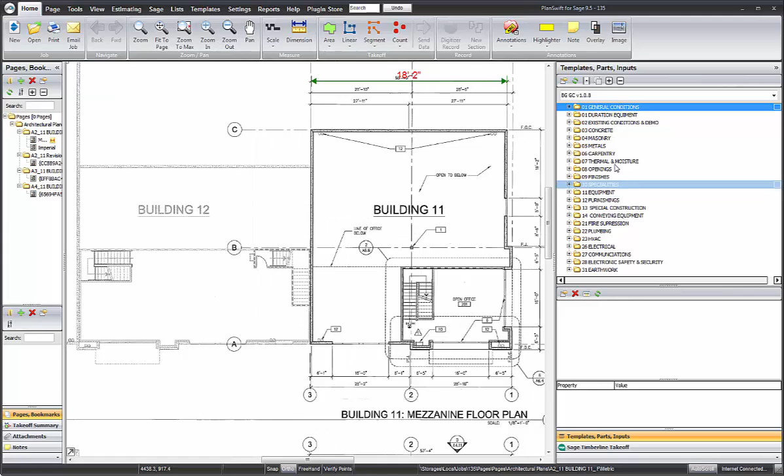I'm looking at them zoomed in, looking at this small area here, and over here on the right is the plugin. You can see that we have the top levels that are all compressed upwards.

If we open up a top level like concrete, it will open up and you can see the sub levels. And then underneath the sub-levels you can see the detailed assemblies that we have. You know they're detailed assemblies by the icons that show you how you are going to use the assemblies.

Count mode here, area mode here, linear mode like this. Sometimes this icon right here can be used for linear also.

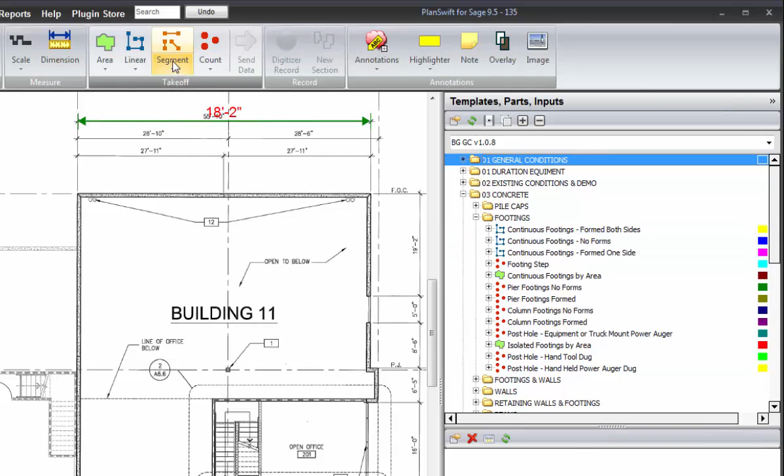So how you use the plugin is you have your plans, you have your plugin, and you find the area for the type of work that you would like to take off, and then you drill down until you find the plugin that you would like to have.

Now I'm just going to do some quick examples here to show you how to answer the questions and use the plugin, and then how to review the plugins.

I'm not going to be overly careful about making sure I'm right on the lines and all that when I'm doing the takeoff. So as I drill down in the concrete, I would like to take off some linear, actually first I'll take off some column footings.

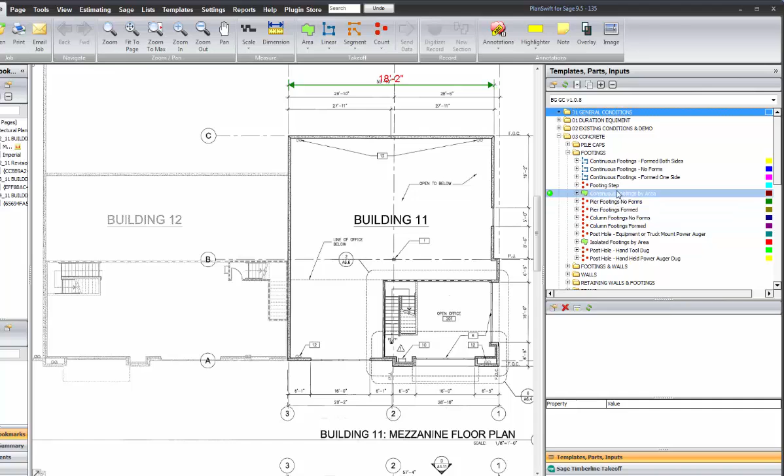So I would say yes, we're going to take off some column footings. They're going to be formed, and when you find the assembly that you would like to take off, you look for this green button and you press it and click on it with your mouse.

What happens is it brings up this dialog box, and you can see we have the title of the assembly up here, and you can modify this if you want. So I'm going to say this is column footings formed in Bldg 12, so you can modify the title.

Now you get to answer the questions. Here's a footing width, here's a footing length, and here's a footing depth. These are starting point values that are stored over inside of the database, but you can change them on a job by job basis if you want to do so.

Here's a concrete PSI. There's actually a list of different PSIs, so you click the list icon here and you can choose a different list, and you can modify the waste percent if you'd like.

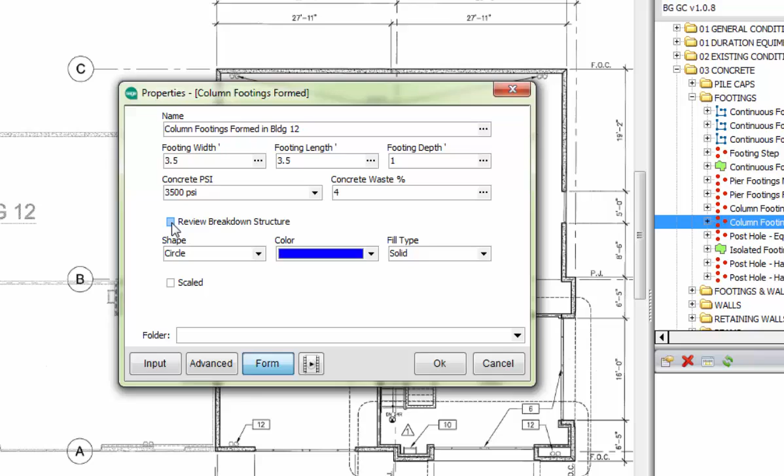Down here is location, floor, zone. They're WBS codes. You can turn them on or off. If you do not want to see them, turn them off. If you would like to see them, turn them on. You have location, floor, zone, WBS 1, 2, and 3.

And then down below that, you have the shape of the, in this case, the count mode that we're going to have, which I'm going to say is square. We have the color, and you can pick different colors if you like. And then here is the fill type, that will be inside of the color.

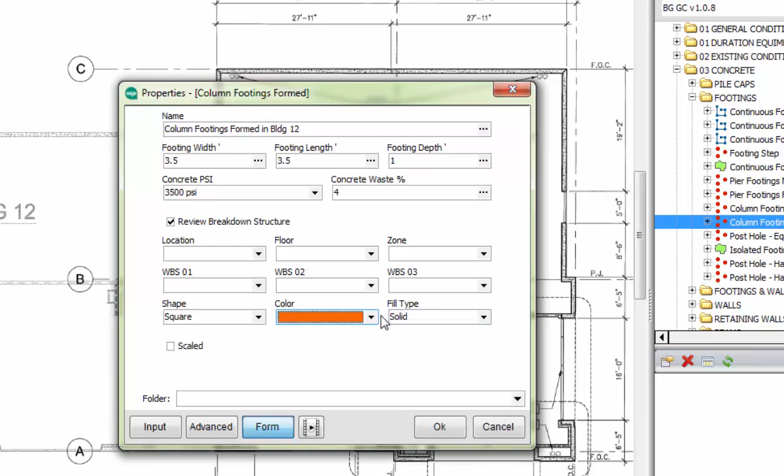So when I'm all done setting this up, I click OK, and now I can click the places where I want to have the columns, and I'm just making up some values here. When you're done with your takeoff, you hit escape, and now you're on to the next takeoff that you would do, which in this case is going to be linear footings formed on both sides.

So I find the assembly I would like to have, I click the green button, the dialog box comes up again. It's going to remember some values. I'm going to go back to 3 foot wide, 1 foot deep. Do I want a keyway?

I can say 1 or 0, 1 for yes. What's my concrete waste? I can modify that if I like. And once again, here's my concrete PSI question and our WBS codes. And here's our color issue if we want to have that, modify that again to what you want.

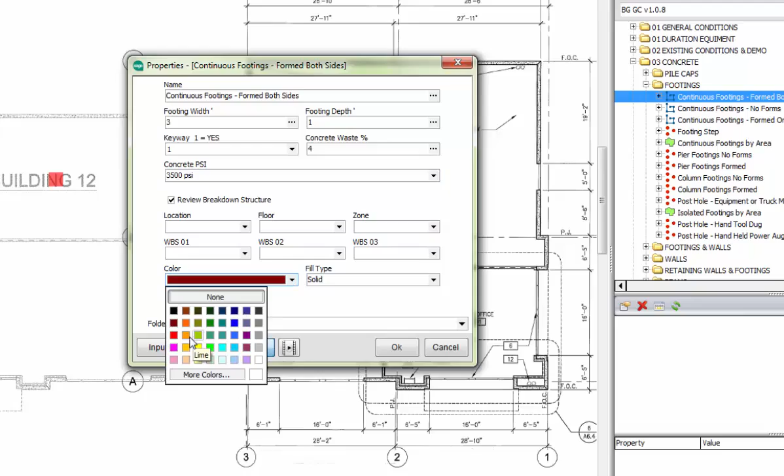When you're all done, you simply then outline the area as we have it, and as I said, I'm not going to be overly careful about this. There we go. When you're done, you click escape, and that is taken off.

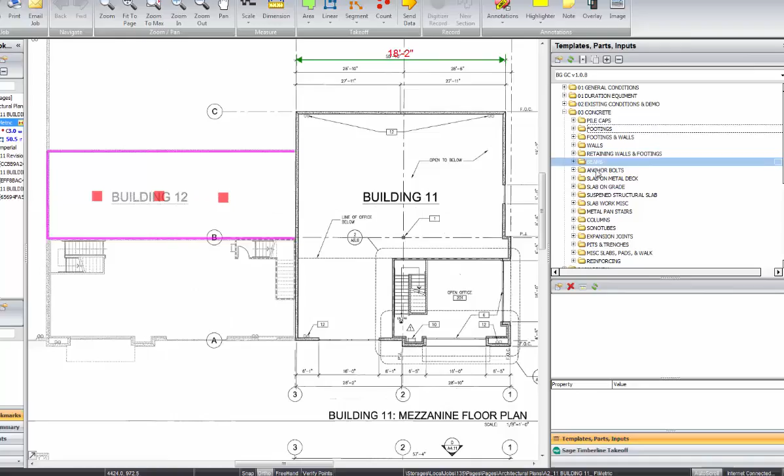Now I would like to take off a slab on grade, and that will be to cover this area here. So I come down to slab on grade. There's a number of different choices that we can have. So I'm going to say that this is a slab on grade that is interior with no edge forms.

And I click the button again. It brings up the dialog box. In concrete, you know, it's very similar. You need thicknesses and length and widths and concrete waste percentages and such, and then what your PSI is going to be.

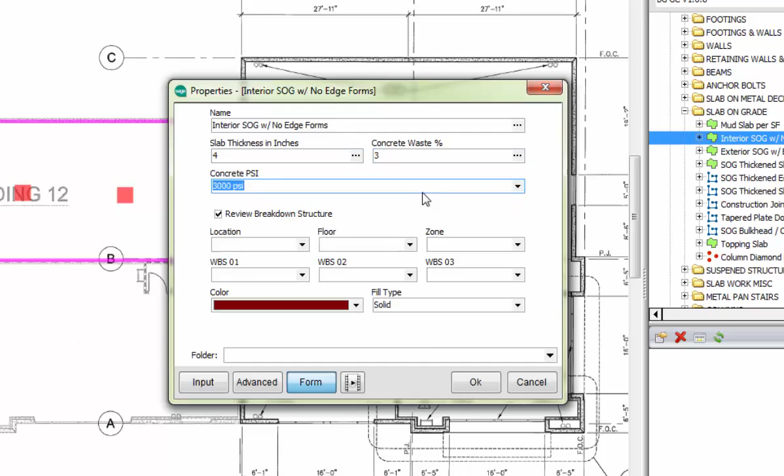I could click OK, and now I can come in and take off this slab on grade, and again, when you're done with this, you click escape.

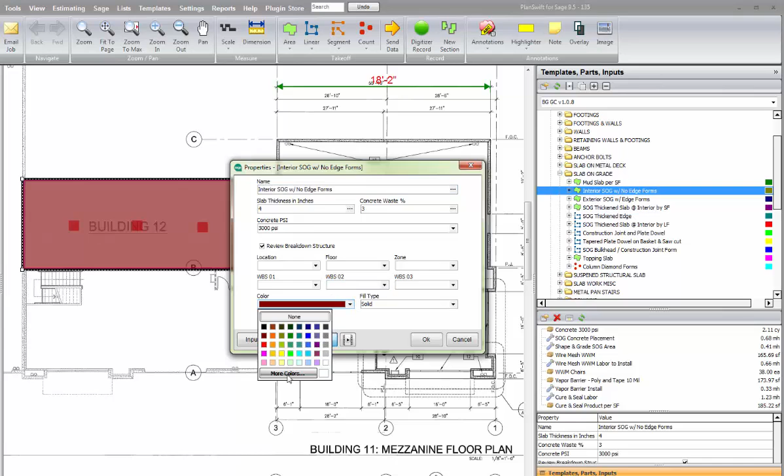If you would like to change colors, you can just click this again, hit properties, come in and modify the color to what you would like it to be. There's more colors and you can make it however you would like to have.

All right, we're going to do one more and then go look at how we can modify these assemblies that we have taken off. I'm going to choose to do a little bit of drywall, so I would open up finishes. We're going to take off some plaster and gypsum, and then non-structural framing and gypsum wallboard.

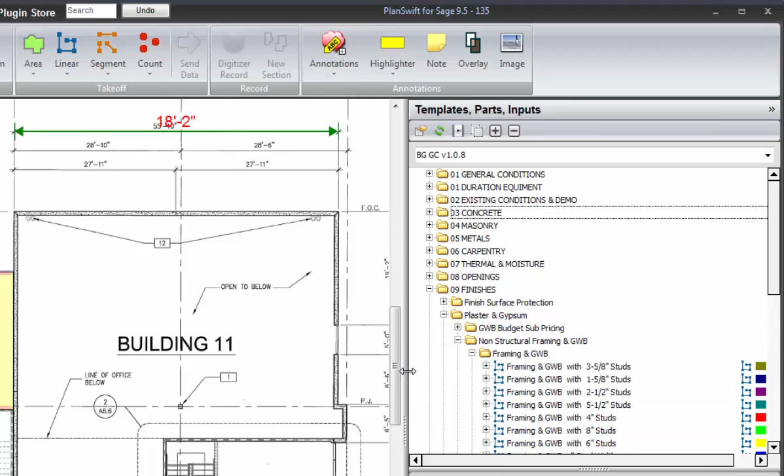So I'm going to click this here, and we got our framing. I'm drilling down to where I would like to be, and I'm going to say we need 3 5/8 studs, which is at the top because it's the most common use. I click my icon again, and it's going to bring up these values. Now I've chosen this assembly because it's pretty much the most complex one in the entire plugin that we have.

So you start out at the top with the color. Here's the name, which I've shown you how you can change. Here's our stud height, I'm going to say this goes up to 9. Here's our framing labor, square foot per man hour. So here's where you get in your labor productivity, and you can change that up and down on a job by job basis as you want.

Here's your stud gauge. There's a list for the stud gauges that you would like to have here. For the track gauge also, I've made it so you can keep them separate if you like. Here's your stud spacing on center in inches, and you've got your choices again for that. So I'm going to say this is 16 inches on center.

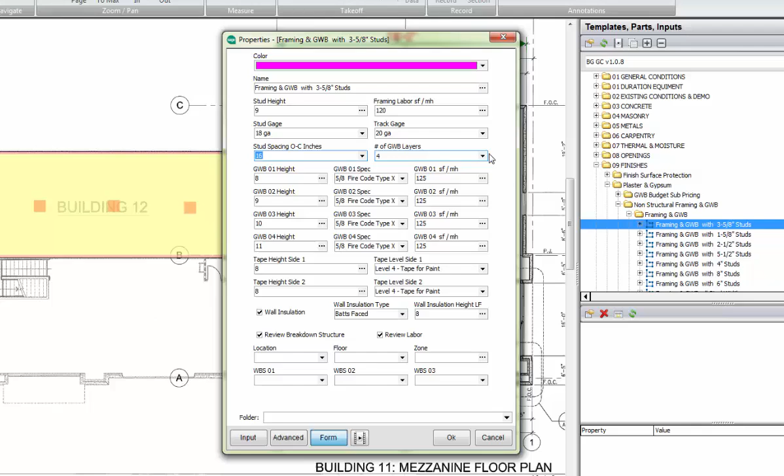And here's an important question: the number of gypsum wallboard layers. I have 4, you can see 4 lines down here. If I change this to 2, it will modify this to the 2 lines that you would like to have. So I'm going to say both layers are going to go up to 9 foot. I can pick the type of drywall that I would like to have. In this case, they're both going to be type X, but you can change them if you'd like.

Here is my productivity in square feet per man hour to set the drywall. And once again, you can raise or lower this as you see fit for your crews in the area you're working in, the way you would like to have it.

Even though the studs and the drywall are going up 9 feet, I'm going to only tape it to 8 foot. And here is the tape-in levels that you want to have for both sides, because you're going to have one side and then the other side on an interior drywall. So I'm going to say that we are going to tape this for paint on both cases.

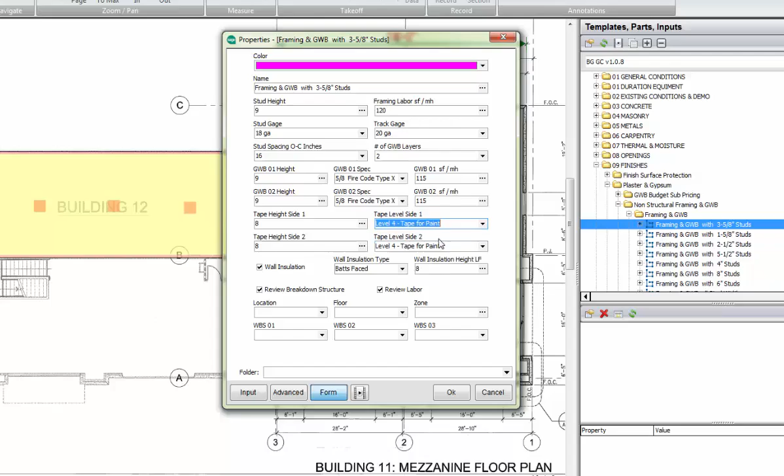When I'm done with this, I click OK, and now I can come in and indicate the drywall that we would like to have. I'm just doing this to show you how to use the assemblies in the plugin.

Now, when you're all done with your takeoff, you can move over to the estimating tab. You can see here are the 4 assemblies that I have taken off. These are the takeoff values that you have. But notice that there's a plus sign to each one of these.

So if I go to the first one for the column footings, where I changed the title, and I click the plus sign, here are all of the values that are being taken off. Here is the purchase of the concrete, and here's the cost of the concrete. Here is the footing forms.

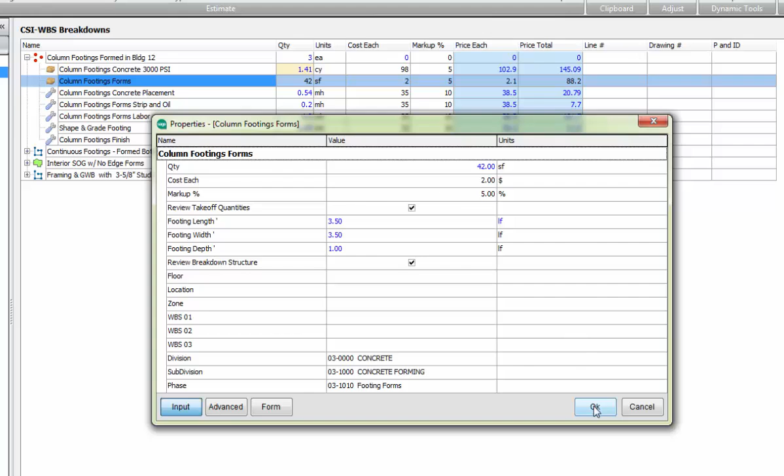Now if I go into and look at the properties, here's the length and width that we have. Here is the quantity, how many square feet. Here's the cost each for the forms. Here is the concrete placement. So this is a labor activity, and you can see right here, here is the man hours for that activity.

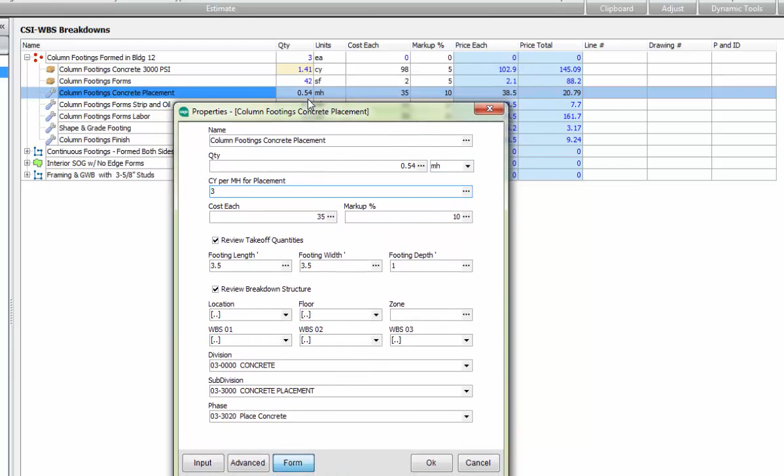You can also look at this on the form level, where I can come in and say I would like to change this to 3, and notice that it is going to change the number of man hours. So we got 0.54 right now. I change that to 3. It's redoing the calculation. It's giving me 0.47 man hours.

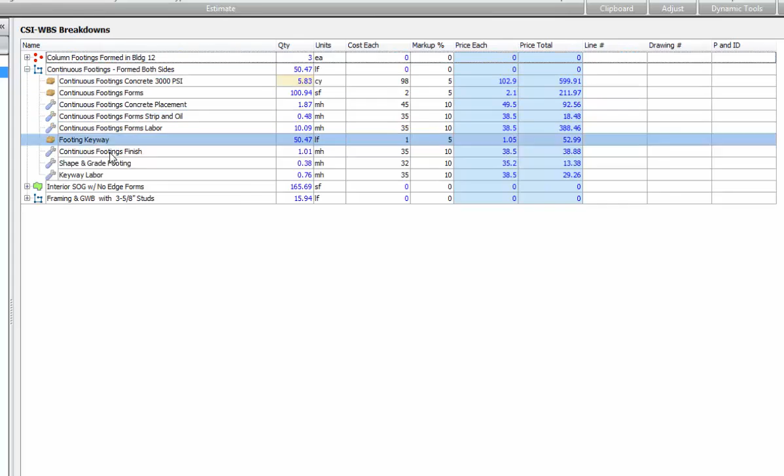So you can look at and review each and every one of the line items that you have for your takeoff. This was the column footings. Here is the continuous footings with all the line items, and you can see the man hour calculations. Every one of these, you can come into the properties.

Personally, I like to form. And you can come into the form and you can modify this as you see fit for your crews, your people, and the work rates that happen in your areas.